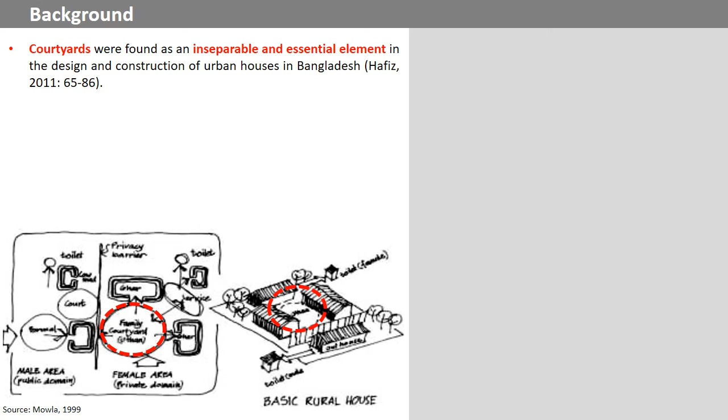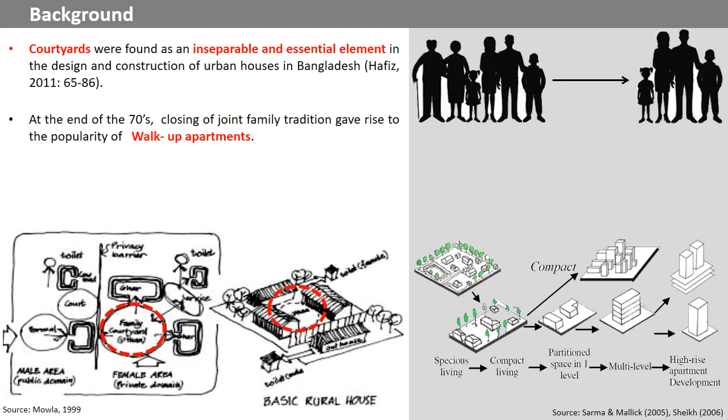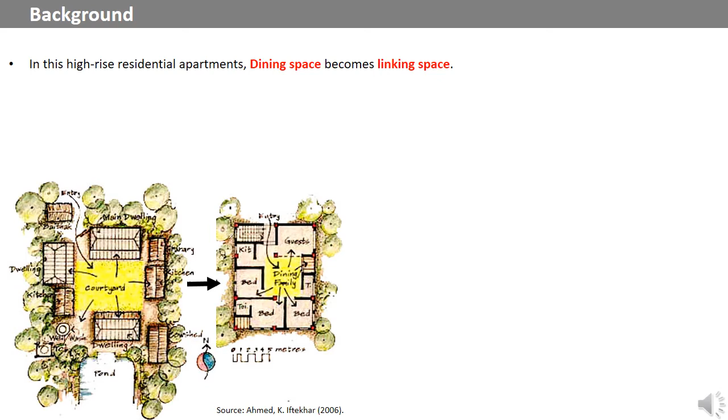Because of the changes in the family structure, land ownership pattern, and rapid urbanization, people prefer compact living than spacious living. As the result, walk-up and high-rise residential apartments became very popular. In urban residential apartments, the traditional courtyard is manifested as the dining space in a consolidated form. As a result, it became a linking space and the deepest part of the residence. To provide daylight in the dining became a real challenge.

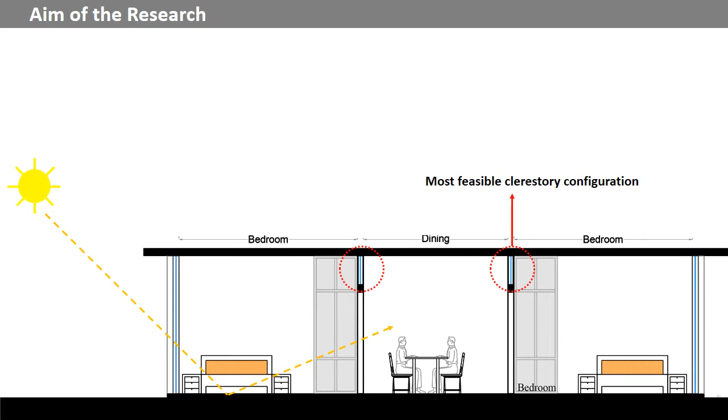The aim of the research is to identify the most feasible configuration of clerestory in inner partition walls around dining space with appropriate window-to-wall ratio of the adjacent bedrooms to increase the amount of daylight in dining space under tropical sky conditions.

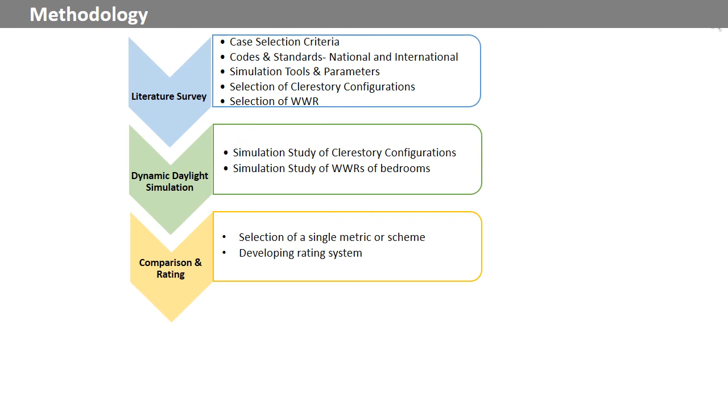Now I would like to describe the methodology briefly. At first, literature survey was conducted to take decisions regarding daylight simulation. Then the dynamic daylight simulation was done to identify the best possible clerestory configuration for partition walls and window-to-wall ratios of bedrooms. Rating system is developed and metrics are compared. Finally, architectural design guidelines are given to improve the daylight condition of the dining space. This is the plan of the case apartment. The dining space is located at the center of the apartment with no openings for daylighting. Average window-to-wall ratio of the bedroom is 19%.

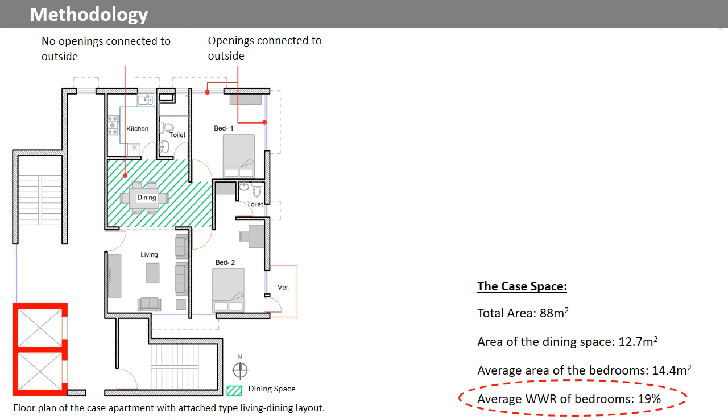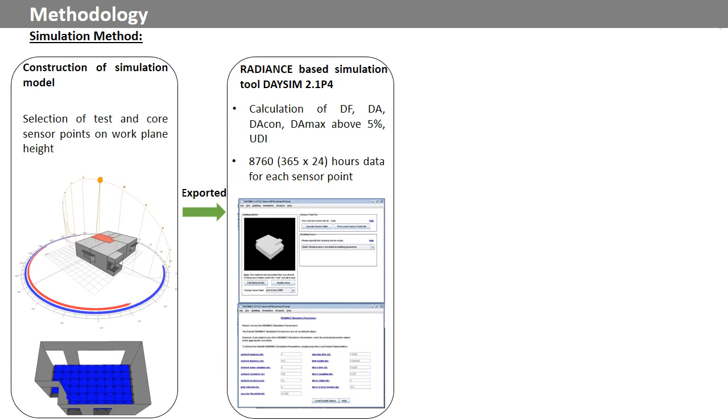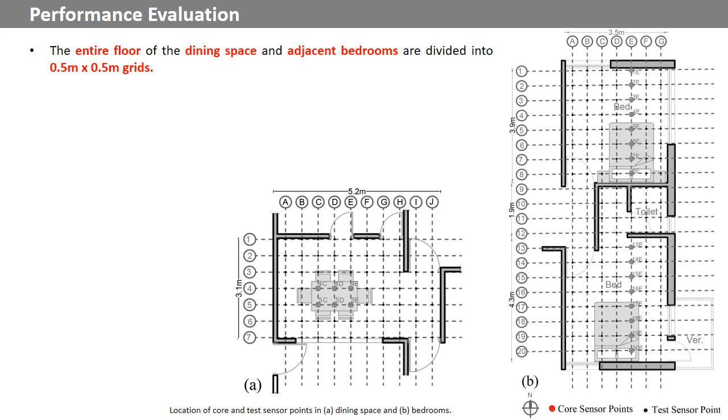Now I am going to present the simulation method. 3D model of the case space is constructed using Ecotect. Then it is exported to Radiance-based simulation tool DAYSIM. Simulations are performed to calculate the dynamic metrics of the case space on an hourly basis using an annual climate file. Then the comparison and rating are done to find the result and give recommendations. Now the performance evaluation. The entire floor of the dining space and adjacent bedrooms are divided into 0.5 meter by 0.5 meter grids. 6 intersection points on the top of the dining table and 16 points that run through the bed heads of the 2 bedrooms are selected as core sensor points.

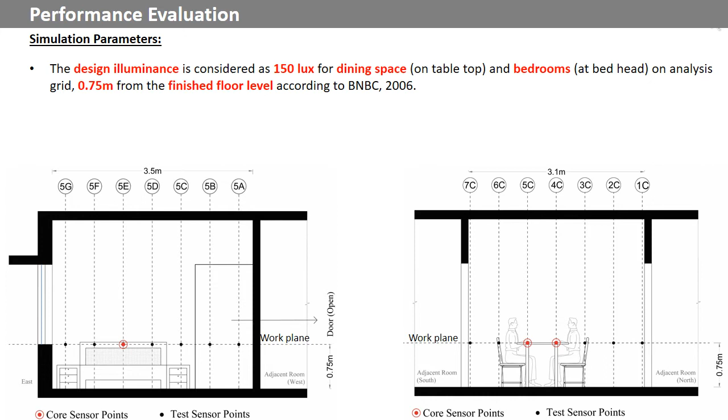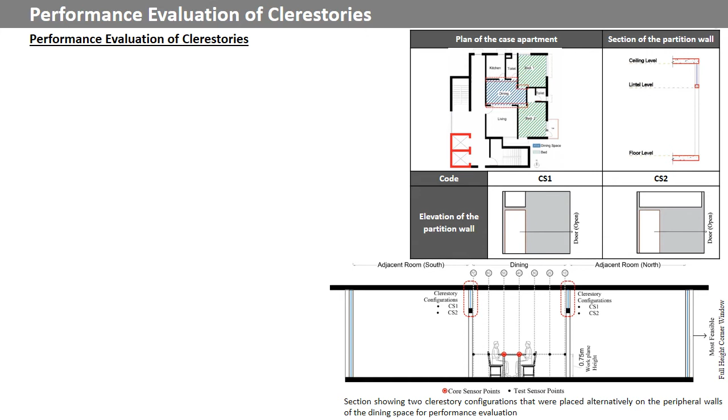These are the simulation parameters. The design illuminance is considered as 150 lux for dining space on tabletop and bedrooms at the bed head on analysis grid at 0.75 meter from the finished floor level. The width of the shading device is considered as 500 mm. To evaluate the performance of clerestories, two types of clerestory window configuration, CS1 that is only over the door and CS2, the maximum possible length of the peripheral wall of the dining, are placed alternatively on the partition walls around dining space after placing most feasible full-height corner windows on the north and south facades.

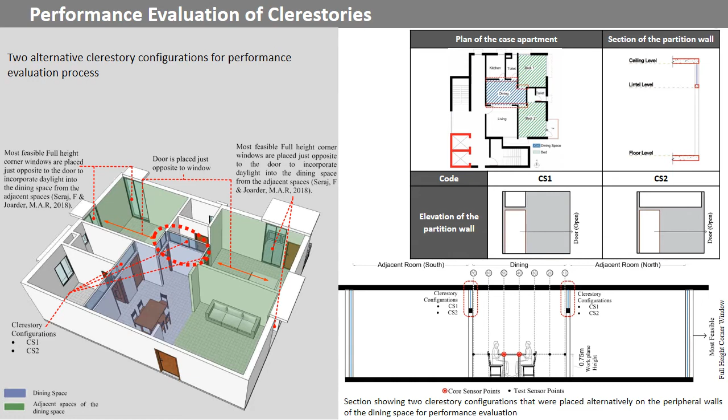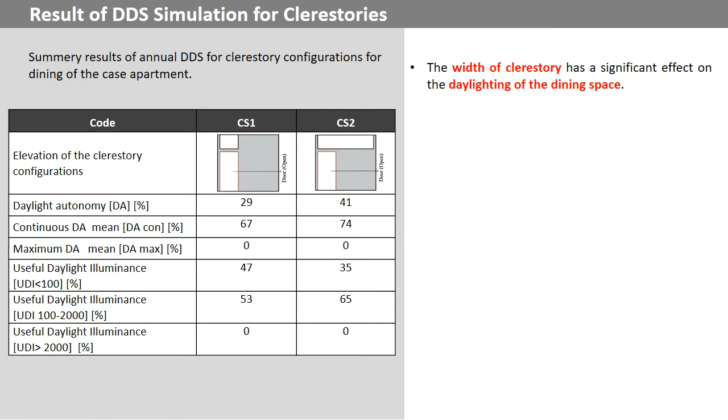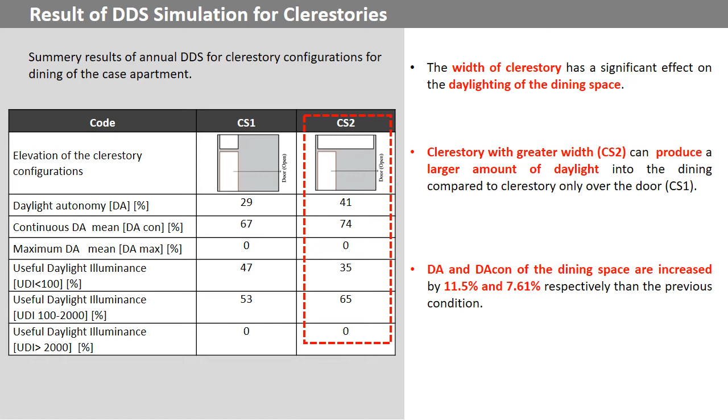Simulations are performed to calculate the dynamic daylight performance metrics, and the values of the studied metrics indicate that the width of clerestory has a significant effect on the daylighting of the dining space. Clerestory with greater width, that is CS2, can effectively produce a large amount of daylight into the dining space compared to CS1. It increases the daylight autonomy and continuous daylight autonomy of the dining space by 11.5% and 7.61% respectively than the previous condition.

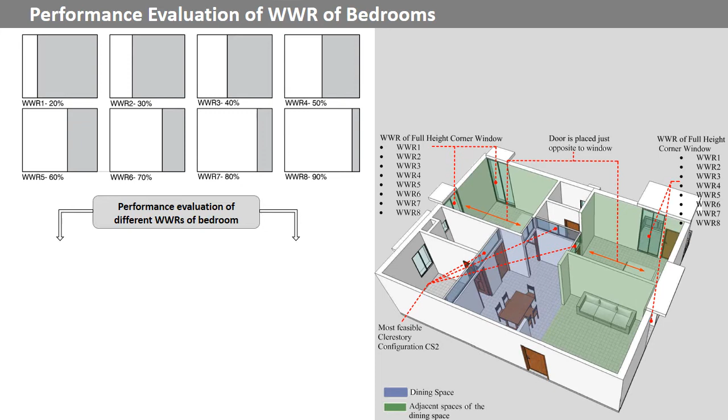Then, 8 window-to-wall ratios starting from 20% to 90% are placed on the bedroom's facade along with most feasible clerestory CS2. Simulations are performed in 2 stages. At first, the impact of different window-to-wall ratios of bedrooms on the dining illumination are investigated along with the best possible clerestory configuration. In the second phase, their impact on the bedrooms are investigated.

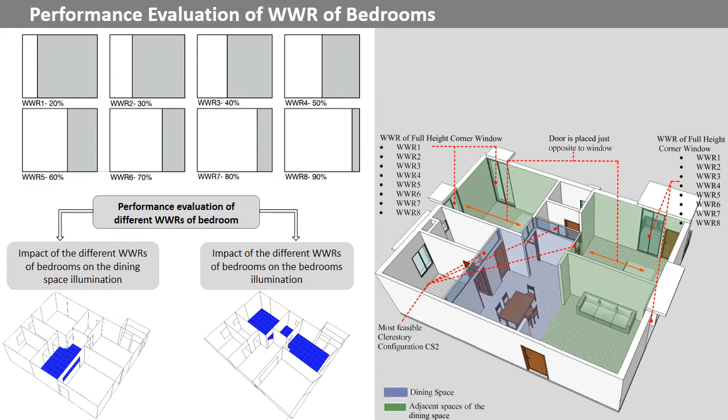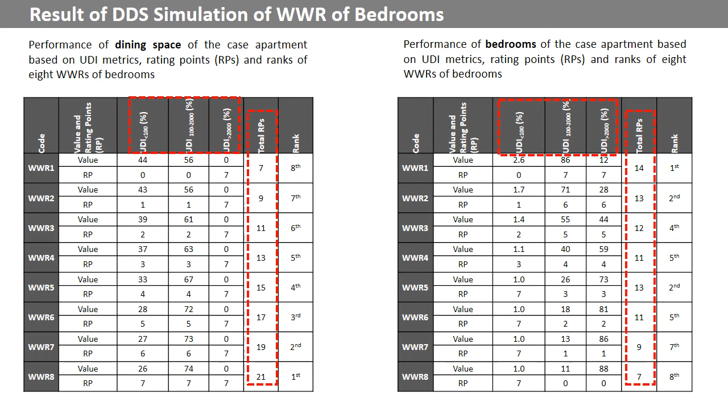These are the performance of both dining space and bedrooms of the case apartment based on UDI, that is Useful Daylight Illuminance metric. In this study, UDI scheme is used to compare the dynamic metrics. As domestic tasks are less desk and screen oriented, a higher upper threshold for UDI achieved can be recommended. Rating points are considered as 7 points to 0 points to suggest the configuration from 1st to 8th place. Rating points of both bedrooms and dining space are plotted in a graph to find the optimum window-to-wall ratio.

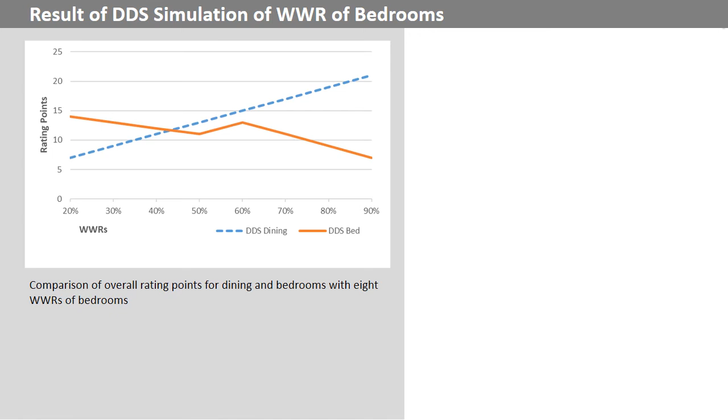From the line graph, it is clear that in case of UDI of dining, rating points are increased with an increase in window sizes in the bedrooms, but rating points do not increase gradually with the increase in window sizes in case of UDI of bedrooms because of overlight and glare issues. 40% window-to-wall ratio along with clerestory CS2 is found to be the most balanced window-to-wall ratio to incorporate daylight in the dining space considering overlight and glare in bedrooms. It increases the value of UDI 100 to 2000 to 60.8% at the core sensor points of the dining space without creating glare in bedrooms.

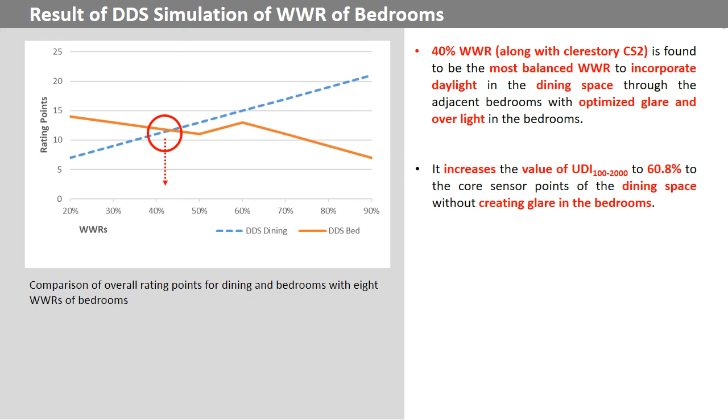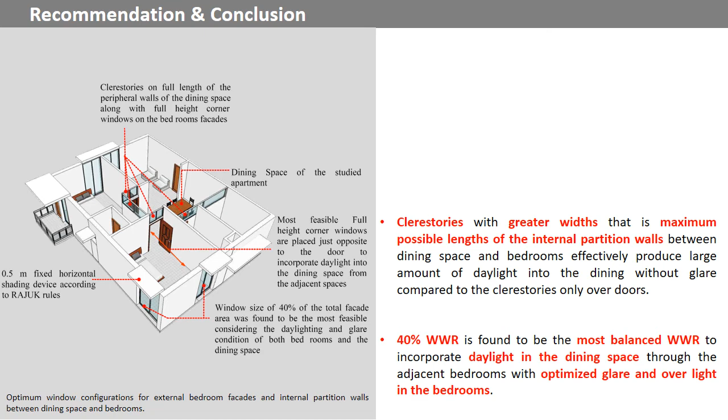These are the recommendations regarding clerestory and window-to-wall ratio of bedrooms. Clerestories along the maximum possible lengths of the internal partition walls can effectively produce large amount of daylight into dining. 40% window-to-wall ratio is the most balanced window-to-wall ratio to incorporate daylight in the dining space through the adjacent bedrooms with optimized glare and overlight in the bedrooms. The distribution of daylight both in bedrooms and dining space is also improved. These figures compare the UDI 100 to 2000 distribution in both dining space and bedrooms after placing clerestories on the partition walls and optimum window-to-wall ratio of 40% on the bedroom's facade.

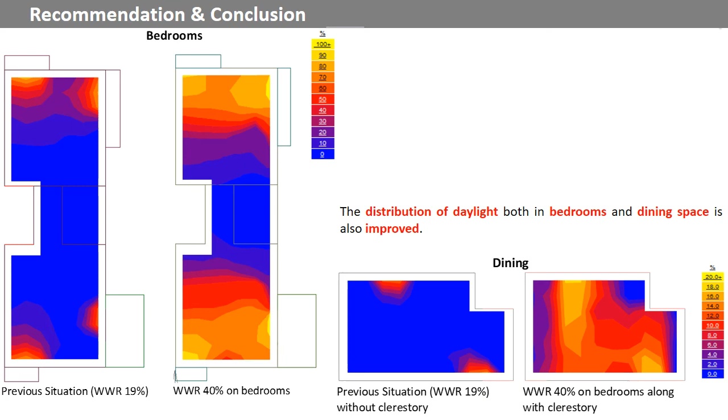In the context of Dhaka, occupants spend more time in the dining space during daytime for various activities while the bedrooms are left unoccupied and could be used as a channel for daylight deep in the residential apartment. Operable internal blinds can be used for the windows of the bedrooms in case of overlight and glare.

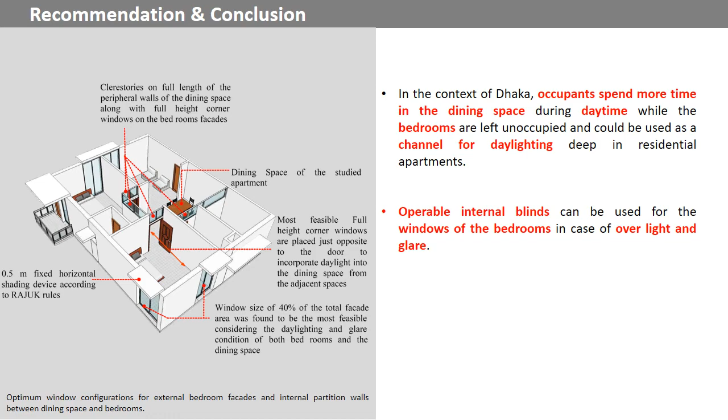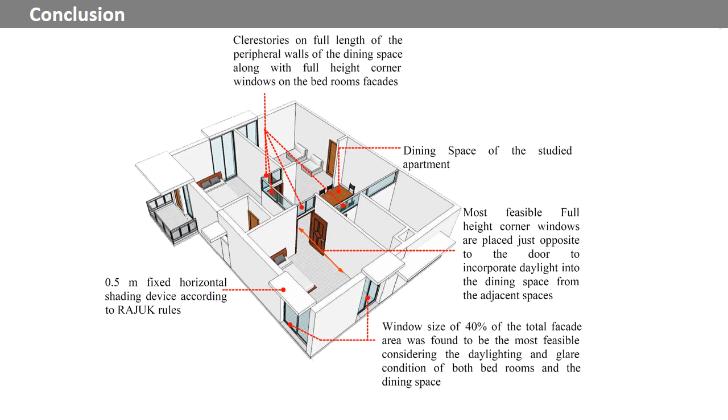Now, I am at the end of my presentation. To conclude, I would like to say that this paper demonstrates how the internally reflected components can be a source of daylight in the deepest part of urban residential apartments. It also proves that configuration of partition walls and window sizes of the adjacent bedrooms have important effect on the daylighting of the dining spaces. I expect that this paper can be used as a basis for further research to investigate other aspects of daylight inclusion.